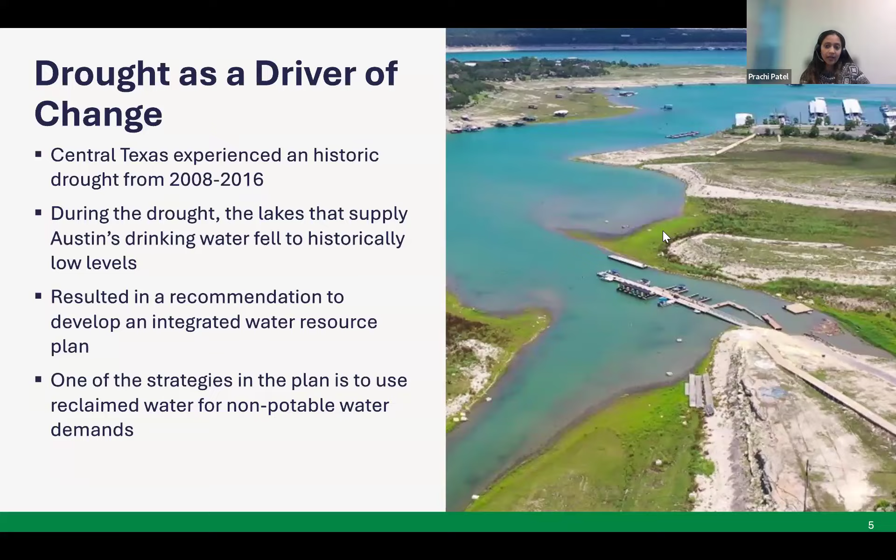And so Austin needs to learn to thrive when water supply is limited. So Austin Water, along with other organizations, worked on creating a 100-year water supply plan. And one of the strategies in that is Reclaimed Water. The idea of that strategy is that over time, Austin uses non-drinking water quality for non-drinking uses.

So for example, in these pie charts, you're looking at different time horizons. What kind of water supply is used for what kind of water use? In 2020, we see this very large gray portion, which is water demands that the city has for non-drinking water uses like toilet flushing, irrigation, etc. And that's being supplied by clean drinking water.

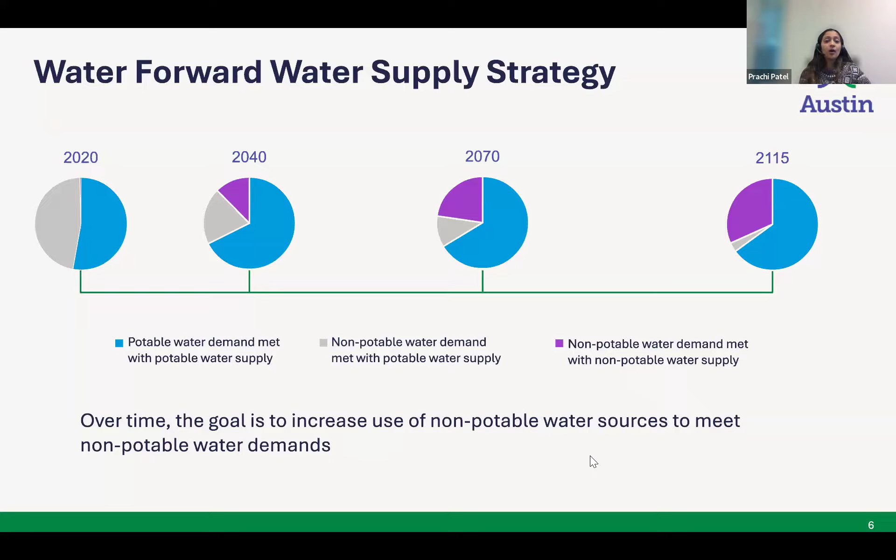And so the idea is that with strategies like Reclaimed or on-site reuse, etc., over time, that gray portion of the pie reduces, and we have the purple portion be larger, which means we have non-potable supplies being used for non-potable demands and not clean drinking water just flushed down our toilets or irrigating our lawns. So that's just a little bit of context. And every development that is doing on-site water reuse or connecting to Reclaimed is contributing to Austin just being more resilient.

So who is required to connect? Small projects. There are specific definitions of different types of projects in the code. But in general, a small project is a project that is smaller than 250,000 square feet of gross floor area. So if you're 10,000 square feet, if you're 200,000 square feet, all of these qualify as a small project. And if you're that size, and if you're within 250 feet of a Reclaimed line, then you have to connect to Reclaimed for your irrigation, toilet flushing, and cooling demands if you have any. That distance increases to 500 feet if you're large, which means if you are 250,000 square feet or bigger.

So in the map over here, we're seeing a little bit of a layout of the Reclaimed lines. And then the light blue lots are the ones which are within 250 feet. So all projects in those light blue lots have to connect to Reclaimed for all their non-potable demands. And that distance increases to 500 for large projects. So that's the dark blue lots. And so if you're a large project falling within those, you still have to connect.

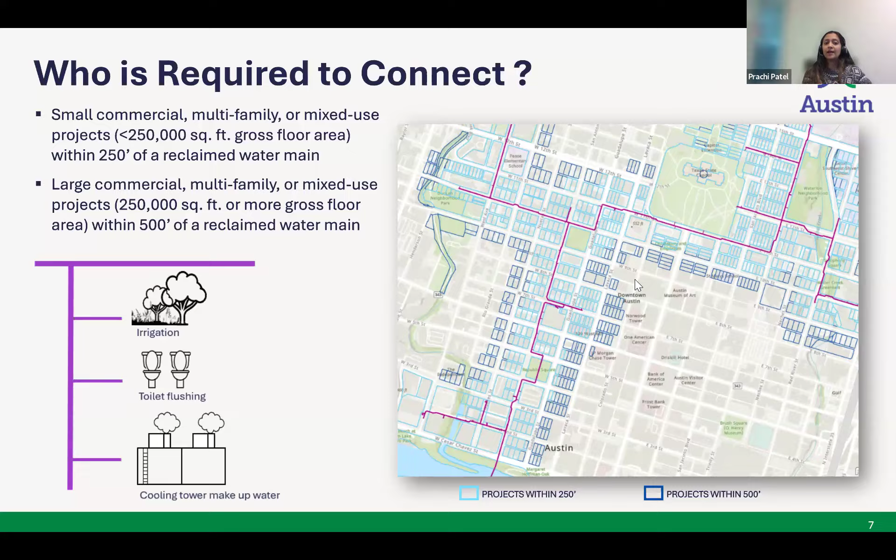How would you know if Reclaimed is near you? So Austin Water has created a GIS application called Records Access Application. You can look at where the Reclaimed network is in there and check if your project is close to the Reclaimed lines. And apart from that, you can also look at as-builts, intersection drawings, etc. All design firms in the city have access to this application. If you are starting to work on a project, please reach out to your supervisor or your GIS POC to ask what the login information for this application is, so you can look at this very useful information.

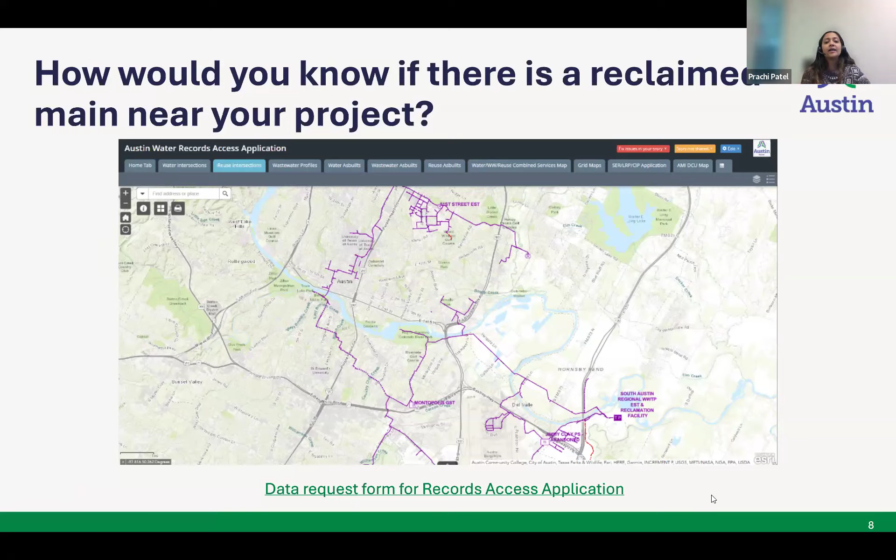And if for some reason you don't have that, I have added a link at the bottom of this slide, which is a request form. Austin Water will vet and make sure that you are indeed a kind of firm that should have access, and then we'll grant you access.

Who is exempt from connecting? So for some projects, the mandate just doesn't apply to them. And these are certain types of affordable housing projects. These affordable housing projects, as code describes them, have more than 50% of their on-site units affordable. If they're rental units, then they are meant for 60% of MFI or lower. And if they're owner units, then they're supposed to be for 80% median family income and lower.

So that the applicant and the reviewer are on the same page that this project is indeed exempt, the housing department is the one that will certify that this project actually meets the affordability requirements. And so if you think your project is exempt, I've added a link over here, and you will most likely get a PDF of this entire slide deck at the end of this presentation. So all the links will be in there for you.

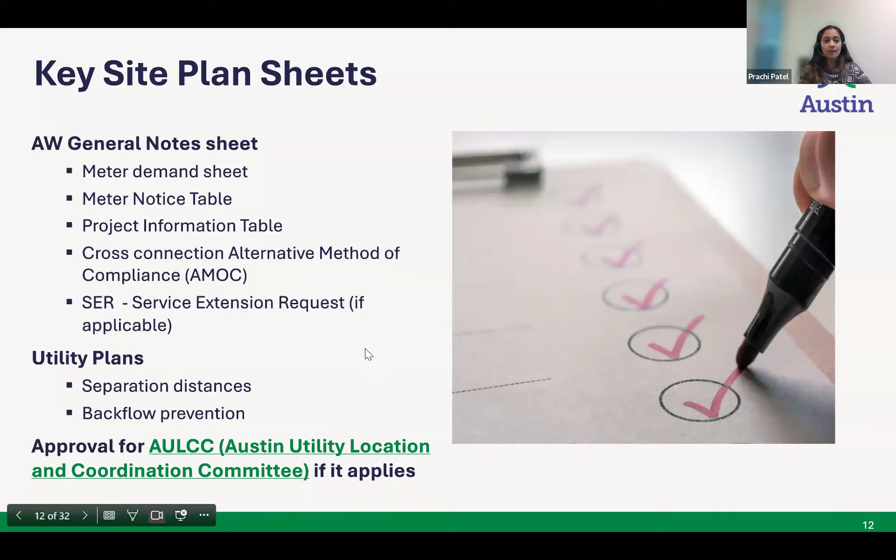But for a Reclaimed review, where I would typically start is the second sheet of your AW General Notes sheet, where there is a placeholder for your Reclaimed SER. So if your project is going to apply for a service extension request for connecting to Reclaimed, then we want to make sure that an approved SER is included in the AW General Notes sheet. Sometimes applicants choose to do those simultaneously, but just note that the SER is ultimately going to tell our pipeline reviewers how the connection should be, what the sizing of the main should be. And so the site plan cannot be approved without an approved SER. And sometimes it's really difficult to review it also.

The second part that is very important is the meter demand sheet. The meter demand sheet typically helps us understand that the project is meeting code and all fixtures that should be connected to Reclaimed are actually getting connected, and therefore what the sizing of the private infrastructure can be, and it's a great sizing tool also. We had a process up till now where the applicant fills this out and then sends it over to us via email. We review it, approve it, and then they include the signed and approved sheet in the AW General Notes sheet. It adds an extra step that is cumbersome, and we want to make it easier for you so that you are able to just include all the information and not have to go through the separate email step.

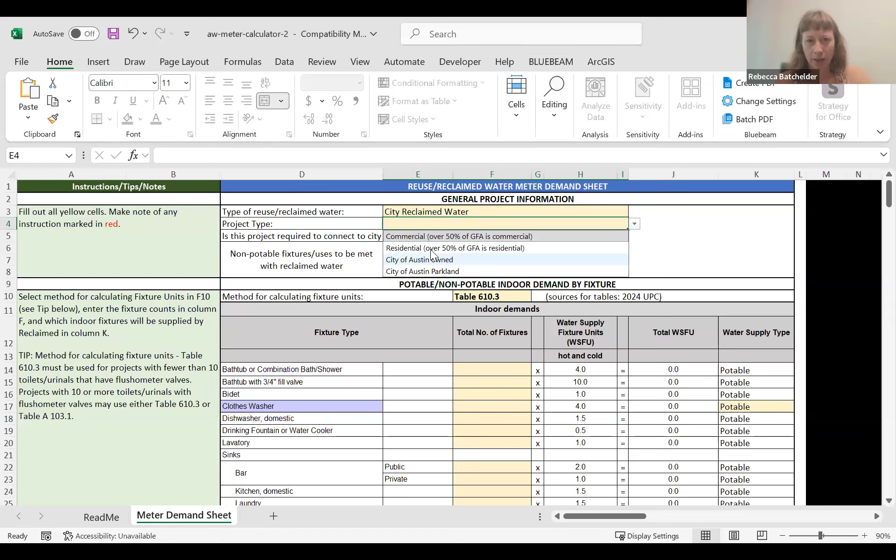For the project type, this just has to do with whether you're commercial or residential or city, parkland. It impacts your billing. So just select whichever one applies to you. Let's call this commercial. Okay. And then is it required? That again will impact billing issues. So select whether you are required. We do have some projects that voluntarily connect, so you would say no if you're voluntarily connecting.

So we'll be required. Then we'll come in here and select what we are connecting to. So we're connecting to indoor uses. We're connecting to irrigation. And let's just say here that there is no cooling tower. So we're not going to fill anything out about a cooling tower. So that's just the general project info.

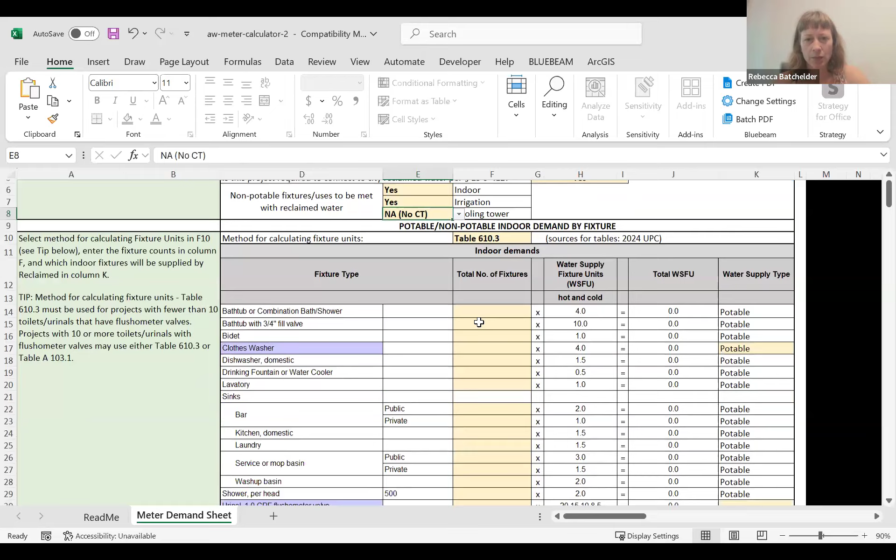Then we'll come down to the indoor fixtures. And this is where we confirm that you are connecting your reclaimed or on-site water reuse non-potable water to the right fixtures. So you are going to select which table here you're going to use to calculate the water fixture units. And there's a little tip on under which circumstances you would use different tables from the UPC to calculate your fixture count. So select the one that works for your project.

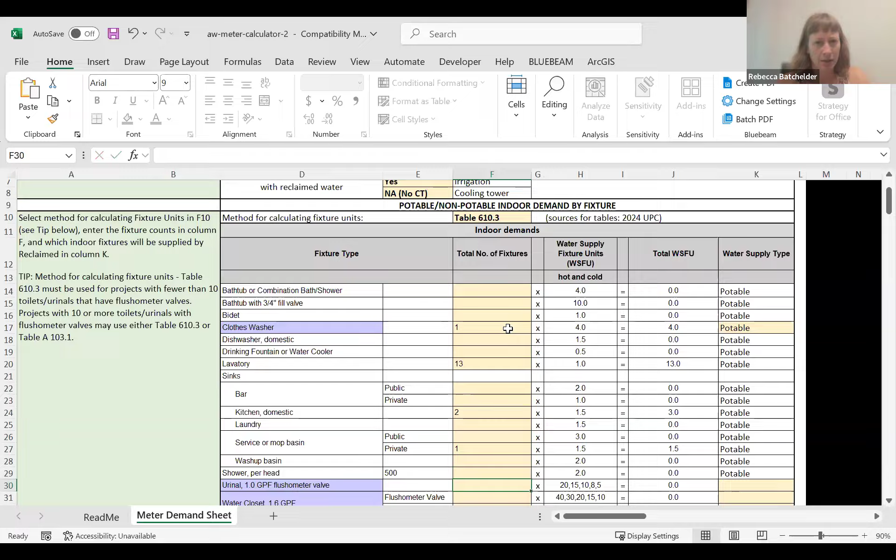And then you'll come in here and just enter the fixture counts for your project. So I'll just enter a couple of these in here. And some of them you'll see have purple. So the clothes washer is purple, the urinals are purple, and the water closets are purple. So all the things that could theoretically be met with a non-potable source are marked in purple.

However, just because they can be met doesn't mean you necessarily want to mark them as non-potable over here. So in column K is where we mark what water source each fixture will be met with. Some of them are white, which means you can't change them. All the potable sources must be met with potable supplies. These yellow ones are the ones where you have an option to change. In most cases, you're not changing for the clothes washers.

Clothes washers are a little bit more complicated to supply with non-potable. There's some backflow issues. So it is possible, and you can talk to us about that if you're interested, but in most cases, we just leave that as potable. But we will come down here, and for our toilets, we're going to change those to reclaimed. And if I've selected that I'm doing on-site water reuse, I will be selecting on-site water reuse down here. You'll see the options update.

So you notice that as you do that, it updates your total fixture counts here at the bottom, where you have potable water fixture units and reclaimed water fixture units. So this is where we're going to confirm that you're connecting the right sources to the right demands.

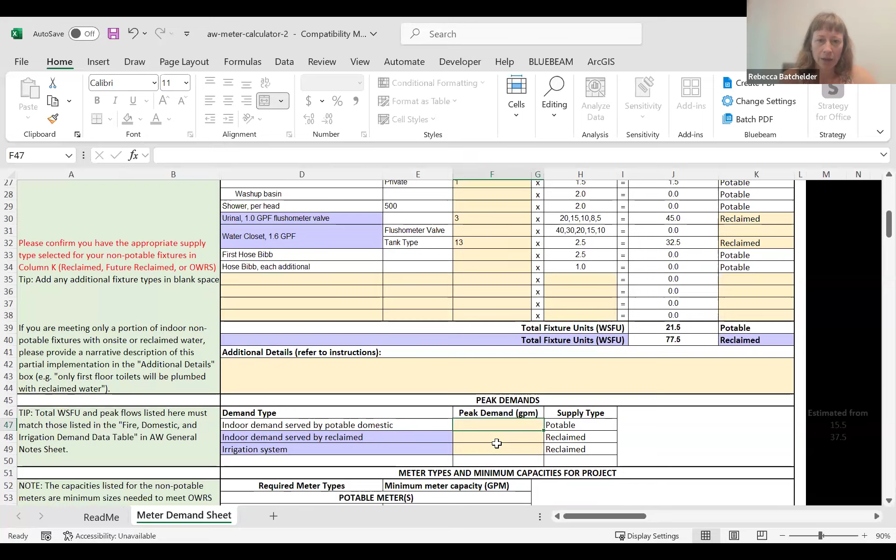Now you're going to come down here for peak demands. This is where you convert your water fixture units to a peak demand using the appropriate methodology per plumbing code. So you're going to enter that in here. You're going to do your indoor potable domestic. That will be a conversion of this number here, the potable fixture units. You'll convert that to a peak demand.

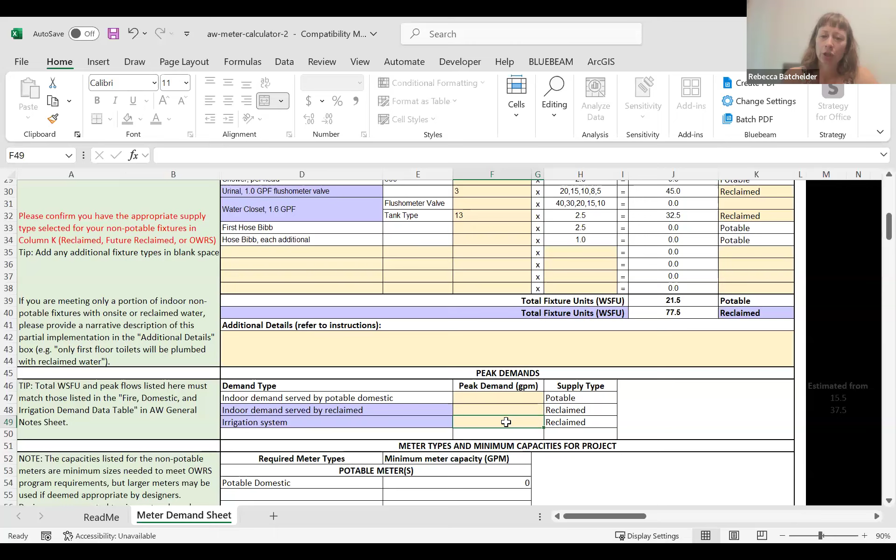Then you'll come down to your indoor reclaimed fixtures. That's 77.5, and you'll put the appropriate corresponding peak demand for that number of water fixture units. For irrigation, you just enter in what your irrigation designer provides you, whatever you anticipate your peak demand being for irrigation.

And for a reclaimed site, that's pretty much all you have to do, but what you'll end up with is something that should be helpful to you in your project, which is this little chart down here should automatically update. After I've entered in the information, let me put these in here. So this was for peak flow. This ends up being 29, and this ends up being 37.

And so now you'll see here, this table is set up to reflect the meter notice table in your Austin Water general notes sheet. So you'll see it has a section for potable meters, a section for reclaimed meters, and a section for potable backup to OWRS meters. And this will help you understand which meters your project should have.

Let's put irrigation in here too. We'll do 20 here. So here it shows that these are the 3 meters that you're going to need for your project. Particularly on on-site water reuse projects, people can get a little bit confused as to what type of meters they need for their project. So this should reflect all the types of meters that you need. And then we have this stuff about billing that is just for our use, and you don't have to mess with it at all. So that takes you through.

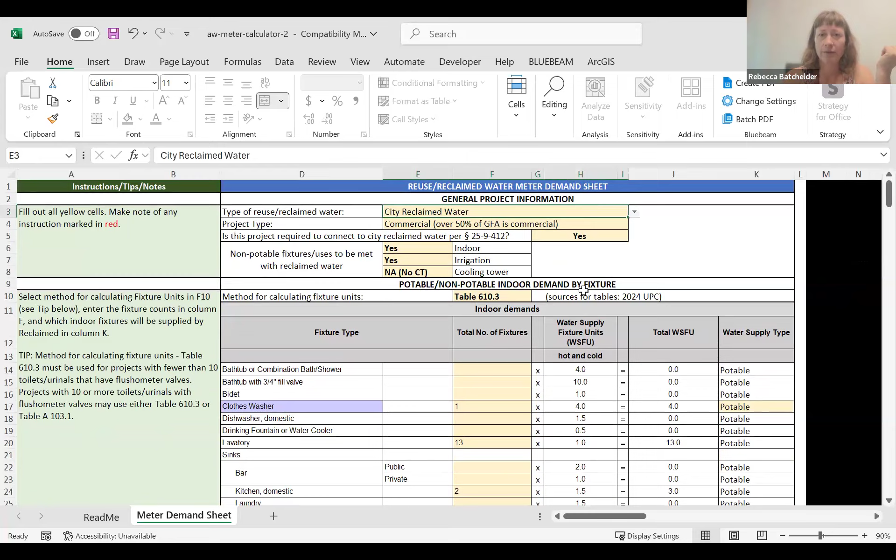There are a few considerations when you are doing OWRS or fee in lieu. I won't go into all of that right now, but it should be relatively intuitive. And if you have any questions, you are welcome to reach out to me or Prachi, and we can help you get the right buttons clicked. So I'll go ahead and stop there and pass it back to Prachi.

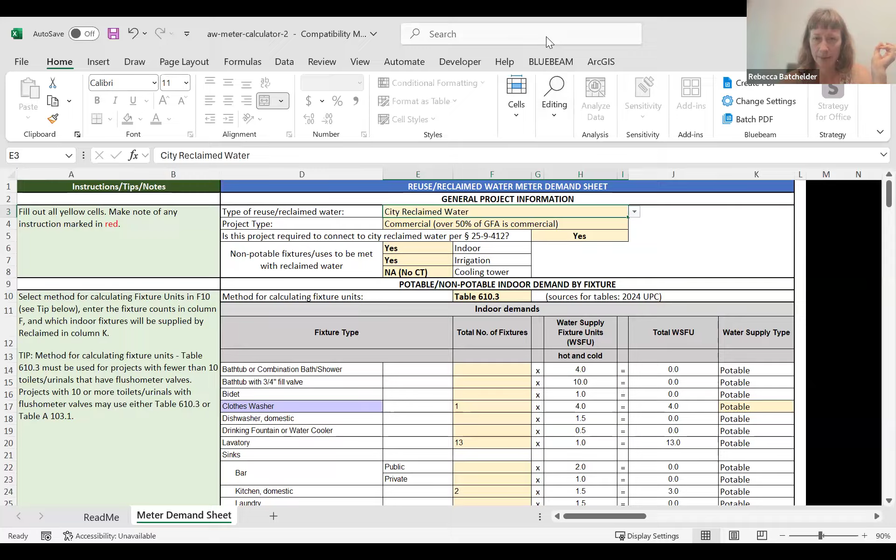Thanks, Becca. All right. Is it showing my presentation again? Yeah, okay, great. Thank you so much, Becca.

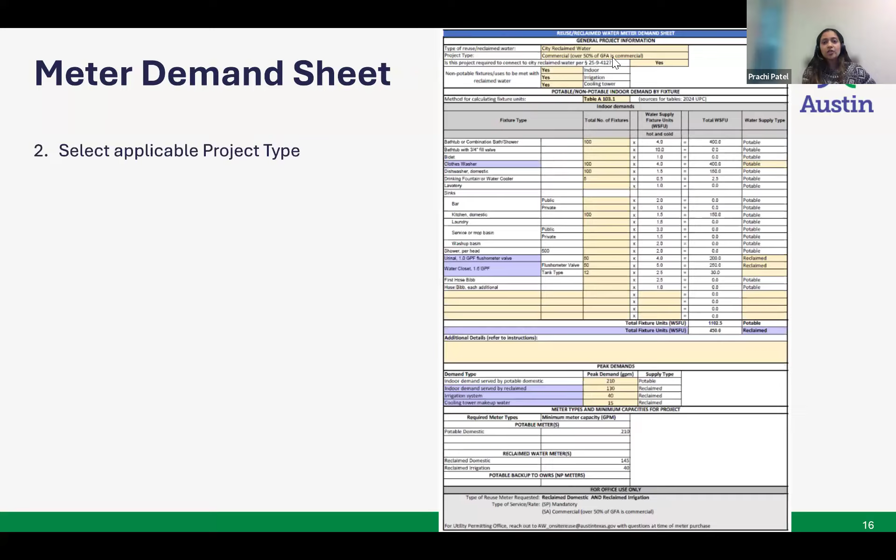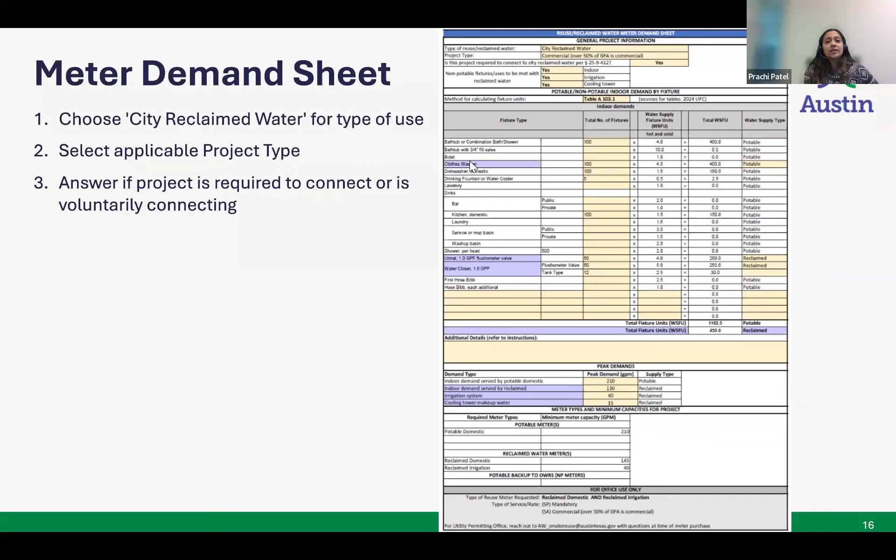And so just to recap what Becca just showed us, on your meter demand sheet, you want to select the type of water, so reclaimed water when it comes to reclaimed projects, and select the applicable type, whether it's commercial or multifamily. Answer the question whether you're mandated to connect to reclaimed or if it's a voluntary connection. If it is mandatory, chances are you probably need to answer yes for all the applicable demands. If you don't have a cooling tower, then you can just say NA over here.

You input this cell for sure, which is going to help you select the method for calculating your fixture units. Add fixture counts right here and select reclaim for your toilet flushing and urinal use. It'll automatically summarize your water supply fixture unit counts over here, and your MEP will be well aware of how to then convert that into gallons per minute demand down here.

The irrigation and cooling tower demand would be inputted by your MEP by their calculations. And as Becca demonstrated, it would then make this summary chart for you. And so that's all you need for your meter demand table, and you go ahead and include that in your AW general notes sheet.

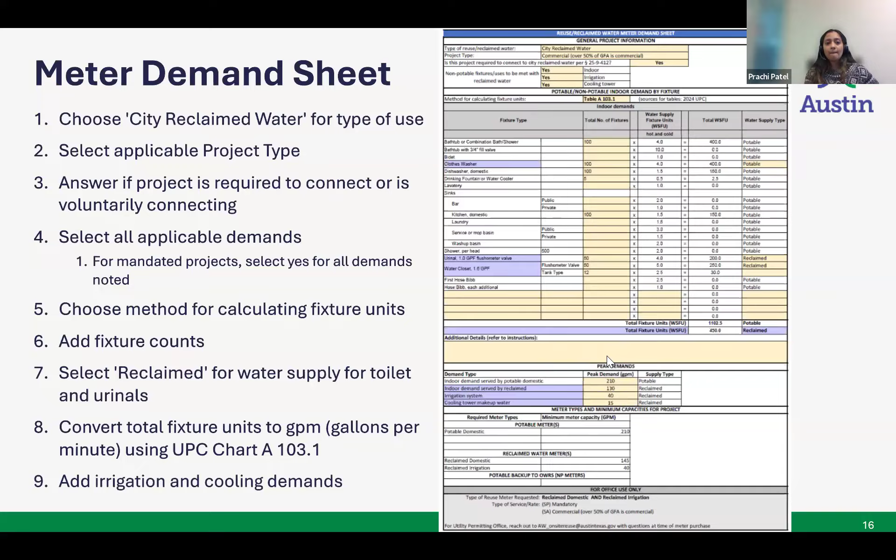The next thing you want to look at is your meter notice table. The meter notice table is where you're going to actually size your meters and request the kind of meters you want. From your previously filled out meter demand sheet, you have this summary chart that's showing you how much potable domestic demand, reclaimed domestic demand, and reclaimed irrigation demand your project has. So based on that GPM, you want to request appropriately sized meters.

So for example, over here, if it says potable domestic, up here in the potable section of the meter notice table, this applicant is requesting a 3-inch compound meter. Make note that you must always have an address with your meter. And there are other details, for example, the max GPM that the meter can handle, and then service units attached with that meter. A service unit is a way to assess the impact that the project is adding, and therefore the impact fees that are levied on the project.

We will have similar information for reclaimed domestic and reclaimed irrigation in this section. And just note that reclaimed meters do not have any service units associated with them, which means that they do not pay impact fees on the reclaimed meters. That should save your project quite a bit of money.

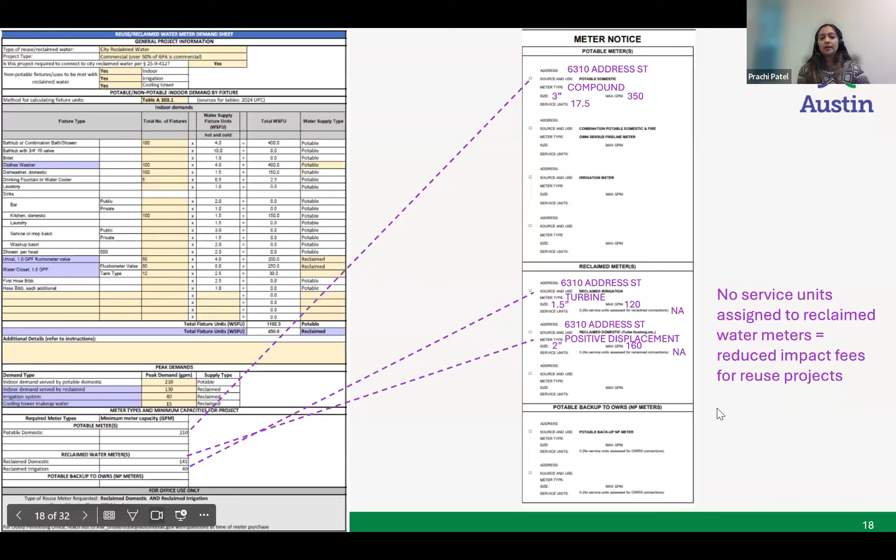And then this meter notice table would also be in your AW General Notes sheet. So that information comes here. This is the first page of your AW General Notes sheet. Apart from those two, there's also the infrastructure table, the LUE tracking table. So for example, if you have a reclaimed SER and then multiple site plans within that SER, then you can track over here the LUEs that are being assigned to which particular site plan.

There is also other helpful information and tables in case your project has multiple buildings. It helps you track which meter is going to which building, and it helps the reviewers track that, and ultimately inspectors and whoever is maintaining the system afterwards. There's also the project information table that includes demand data for indoor, outdoor, reclaimed, etc. And you want to make sure that your meter demand table, your project information table, and your meter notice table are all consistent. This is a very common error that folks make, and an unnecessary reason to get your site plan rejected.

To track all of that, we have created some resources for you. There is Austin Water's pipeline engineering webpage. The link is up here; you will get that in your slide deck. In it there are checklists and general construction notes. The CAD template of that general notes sheet is available there. There's also a very helpful FAQ that walks you through how to fill out each table and avoid any common errors. The meter demand sheet that we went through is also linked right there, and there's also the meter sizing table that helps you size appropriate meters. In addition to that, there's a wealth of other information, so please feel free to peruse that.

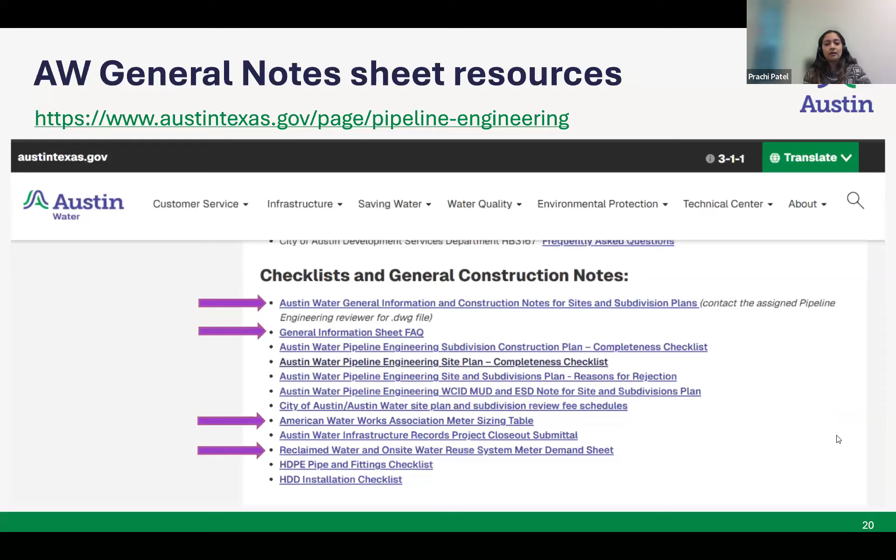The separation distance between potable and non-potable will be 5 feet. Because the project is using a non-potable source, there is a need to protect the city's water supply from any contamination. For that reason, there are backflow prevention requirements. And so immediately downstream of your potable domestic meter, you have to put an RPZ.

The reclaimed domestic meter, if it's only going to toilet flushing systems, does not require any backflow prevention. And then the reclaimed irrigation will have a double check valve assembly, which is very common even for potable irrigation systems. So you want to make sure that your backflow prevention is there. You want to make sure your separation distances are there. In addition to that, there are also color requirements to separate your potable system from your non-potable system.

On the public side, the reclaim main, the code is in the UCM 2.9.3.b.1, where it says that all appurtenances and mains would be manufactured, factory painted, or striped with the Pantone 522 purple. So the idea is if you have a reclaim line or you have a reclaim service, you want to make it purple so that when you're looking at a drawing set, you can tell that it's connected to reclaimed. But if someone digs up a portion over here and they see a line, they should not accidentally connect any potable lines over there. It's an industry-wide standard, and it just helps keep everyone safe and healthy.

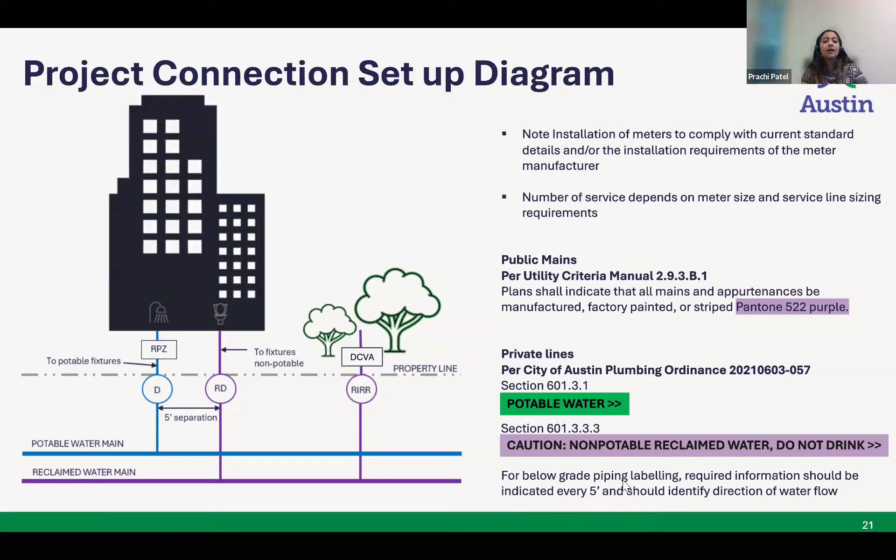And then there's an added note that for below grade piping, the required information should be indicated every 5 feet. And so this is all with abundance of caution and to make sure that while we are trying to be sustainable, we are also keeping health and safety as the priority.

Another thing that helps keep our community safe when projects are connecting to reclaimed is the cross-connection testing. So cross-connection testing is a requirement for any project using an alternative water source, be it reclaimed or any other water source. So that test is required upfront when the project is set up, and the test is required ongoing, meaning once a year after. What it essentially does is make sure that the potable system is only connected to the potable fixtures and the non-potable system is only connected to the non-potable fixtures.

Y'all are in the development side of the world. It is not uncommon that a project is designed and built, and then somebody maybe chooses to expand or renovate. And in that time, we just want to make sure that no errors are made in tapping into the wrong system on the private side. And so the cross-connection test helps us avoid that.

The standard code required test requires completely shutting down one side. So say you shut down the purple side and there's water on the blue side, and then water should only be coming out of the blue fixtures. And then you switch over. You completely shut down and depressurize the blue side, and then water should only be coming out of the purple side. If it doesn't, then the test has failed and something needs to be fixed. Hopefully none of your projects ever end up having that.

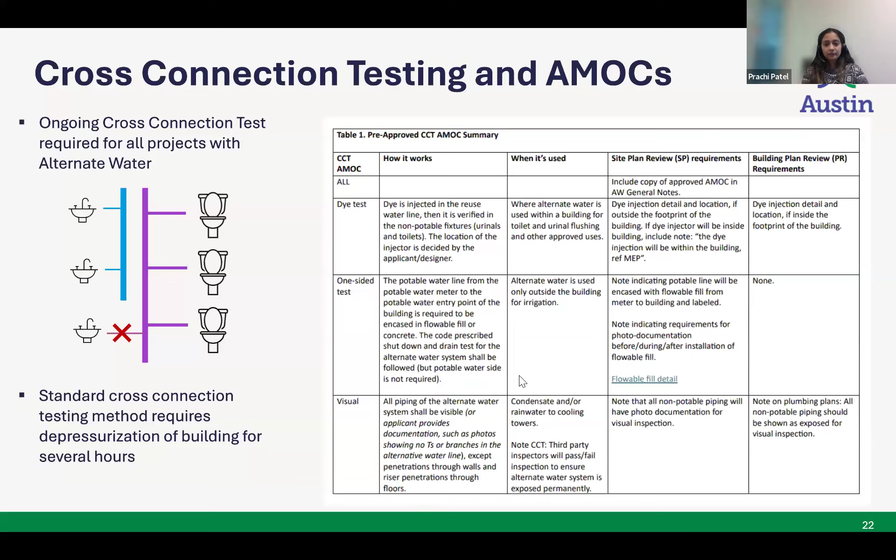But this alternate method of compliance, you want it approved at the onset of your project at site plan stage, and then include that approved alternate method of compliance in your AW general notes sheet. The brief idea of what this AMOC might look like: one of the common methods if you are using water indoors is dye testing. So you have a tank where you can put in dye, and that dye injection can go into your reclaimed water system.

It turns like a bright yellow neon color, and it's a visual way of confirming that this bright neon yellow water is only coming out of your non-potable fixtures and not in your drinking water. And that way you can keep your building running and also successfully do your cross-connection testing.

There's also a common test called the one-sided shutdown. This is typically used when a project is only using Reclaimed, let's just say, for irrigation. Then the potable yard lines will have a flowable fill over them. It's a way to physically stop people from connecting into that potable yard line. Say they're going to do an irrigation expansion or something like that, then people are not going to connect to it. And so that's a one-sided shutdown, recommended for irrigation.

Another thing that you will definitely want to be aware of is separation distances. There will be a lot of utilities in the right of way. And so for Reclaimed, the code requirements for these separation distances are in the Texas Administrative Code, and then there are some modifications in the Utility Criteria Manual for the city. And so what it boils down to is about 5 feet of distance from potable, another utility, or wastewater.

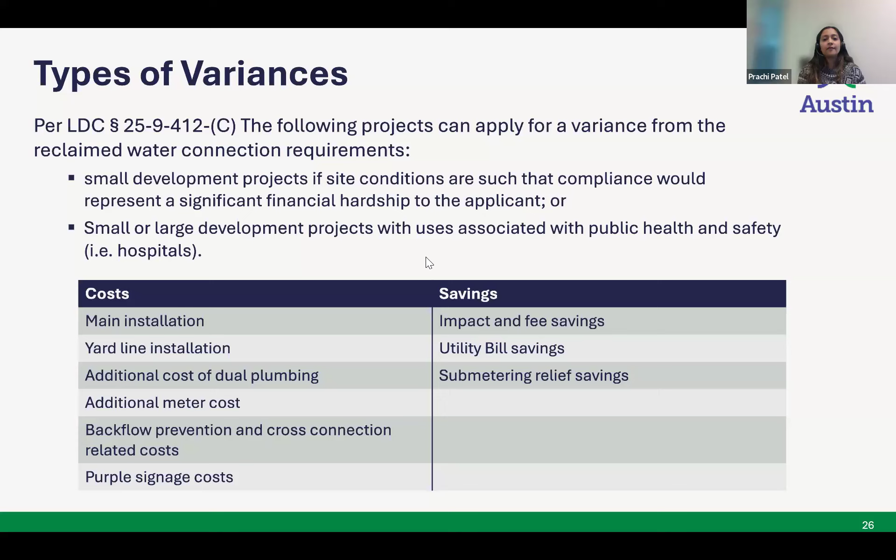In the cost table, you include information on how much of the reclaimed main you're extending and what the cost per linear foot is, how much of the yard line, so the private line you're installing, and what the cost per linear foot is for that. It also includes estimates for costs that will get added to the project because of additional cross connection and backflow prevention testing.

Of course, if you are connecting to Reclaimed on the private side, you will have a separate plumbing system for your toilet flushing. That's called dual plumbing. And so the spreadsheet helps you estimate how much additional cost will come from dual plumbing. There are inbuilt assumptions in the spreadsheet. And if at any point you're like, no, actually, my project is going to have a higher cost burden, you can always include that information here for the reviewer.

And then there are some other portions that you can include. And you'd also include what the total upfront construction cost for the project is. On the savings side, you typically include what your water savings are each year.

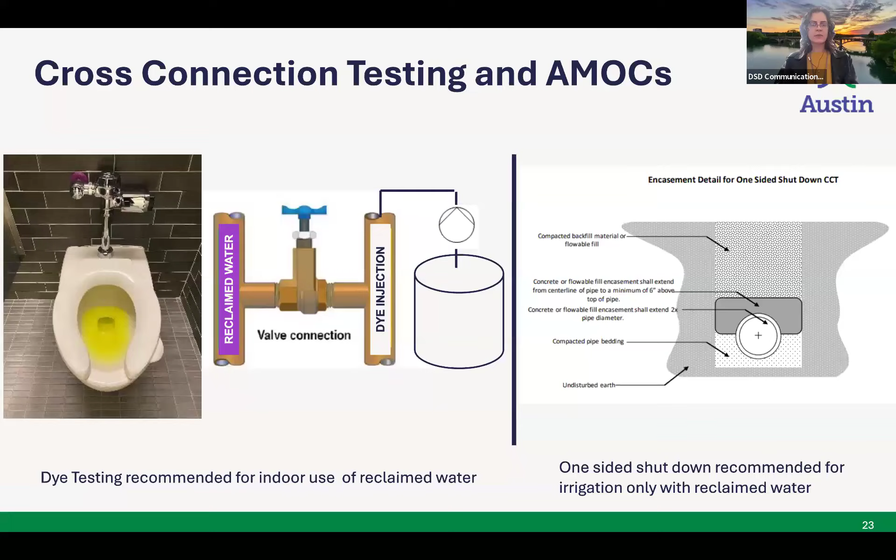Our next question, are the 5-foot separation distances for the public line only, such as the lines in the right-of-way and easements? And do private lines need to meet those separation distances as well? I might want to check in with our site plan plumbing folks and get back to you on that question. But my understanding is that these 5-foot separation distances are only on the public side, so in the right of way. Okay, we can come back to that and clarify in our summary at the end. It'll be going out to our attendees via email.

Thank you. And another question, how is the building square footage calculated? There are various methods now, and some include the garage and some don't. So your gross floor area is determined by the site plan review folks over at DSD. So what you input in your site data table is your gross floor area. An unoccupied space like a garage is typically not included in the gross floor area.

So all the square footage that you would include in your FAR calculations is what gets included for gross floor area, and it's the same number that the DSD team uses, and we use the same number. So the information that you would have to put in your site data table as occupiable area is what is going to determine your GFA.